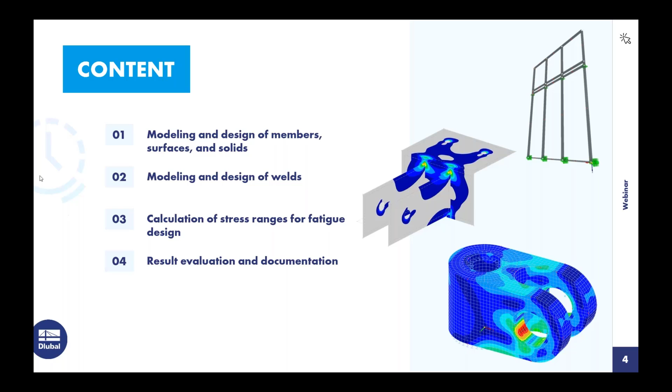For this, I have a short agenda: which elements we can design, what new elements you can design, and how you can document it. In my style, I always want to present all these features in a short story, so I prepared some elements, or let's say models.

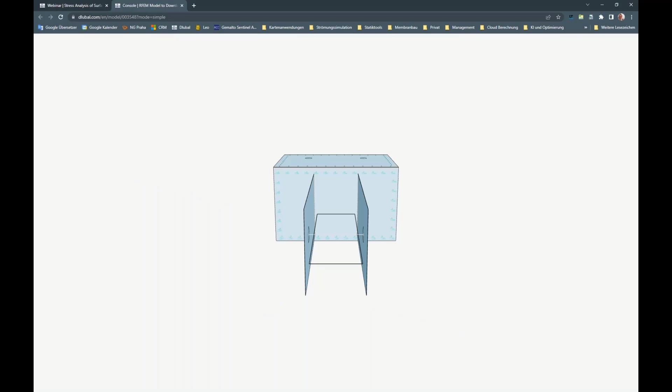We will start today with a facade model from members. Here we try to model it and design the members by stresses. Then we move on to fixing this facade on the concrete slabs by modeling a console. Here we take care about design of surfaces and design of welds between this angle and these ear sheets. Last but not least, we take a look at a solid model. I want to show how you can design such solid models with the add-on, how you can detect stress ranges, and how you can do solid sections.

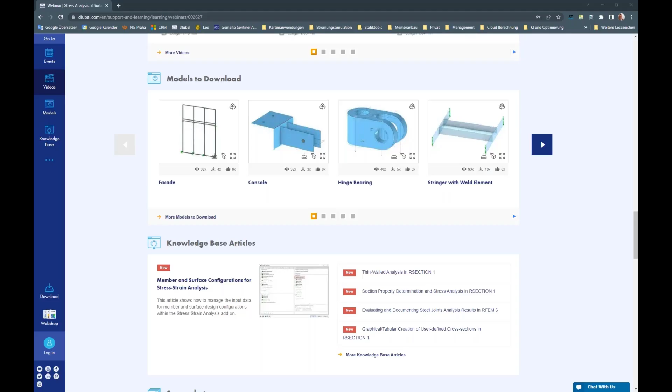So this is the introduction of what we want to do in the next hour. Now I change directly to RFEM. I prepared an open RFEM here. Of course, we can start now modeling this facade by giving this grid.

But I think when you're starting modeling facades, you always will start with a drawing from the architect or whatever. I prepared such a drawing in AutoCAD with two layers, one with axis, one with facade. I'm overtaking this geometry directly from the opened AutoCAD sheet into RFEM by using the import function, the direct interface to AutoCAD.

This is quite comfortable because you don't have to take care about geometries and you can overtake it directly. The only question the program wants to know is how it should orientate it, because AutoCAD has a different coordinate system than RFEM, but our developers implemented a nice option to rotate or mirror it. For this model, the y-axis is Z, and the z-axis we will mirror.

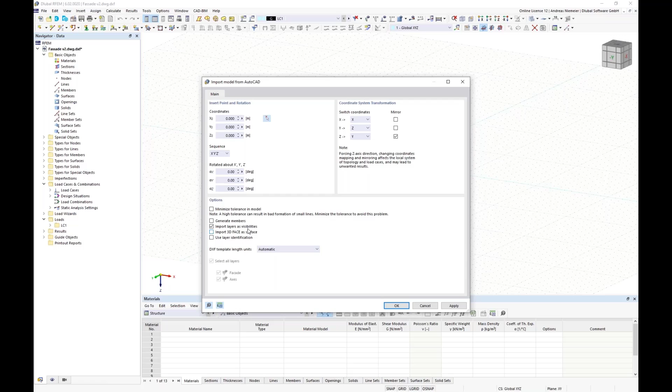To be organized, we say please overtake the layers from AutoCAD into visibilities, which is similar in ours. If we overtake it and confirm the dialog, you will see the facade appear in the background. As expected, we will get two user-defined visibilities: one facade, meaning the outer layer, and one axis layer. For our purpose today, we only need the axis layer, so the facade part we will delete. I select it and remove it.

So now we know exactly how big the facade is, what are the dimensions, what is the grid spacing, and we can go ahead modeling this structure. For this, of course, we take a closer look on this model and see the drawing of this facade, the lines from left to right and drawn over the mid elements.

This is not really suitable for RFEM because you have to define here some contact definitions. So we repair it with this intersection function and create single lines.

In the next point, we try to add members with suitable cross sections, and for this I prepare material and sections before. Therefore, I open here this material table. You see the program already defined a steel with sections from the AutoCAD drawing, but we don't need steel, we need aluminum here.

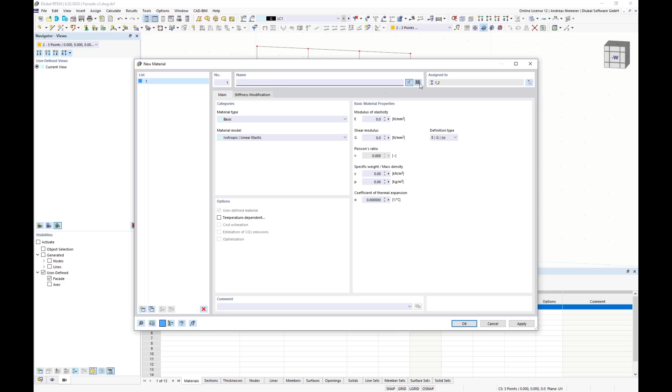Therefore, I delete this import and define here a new material by using this keyword search 6060, and select here, for example, this T6 aluminum from Eurocode solution and confirm it.

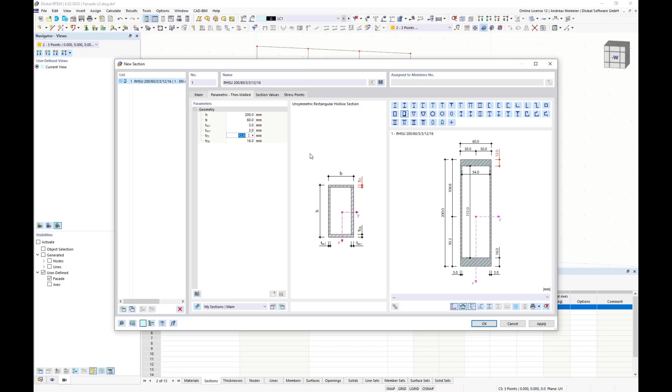It's a rectangular hollow section where you can specify the thicknesses individually, which allows you to simulate all these cases in simplified form. I define here height 200 millimeters, width 60 millimeters, thicknesses 3 millimeters in both directions, and for the short thicknesses I use 5 millimeters.

Because we have a similar cross section for the horizontal members, I select this already defined cross-section, copy it, and modify it so it fits. So I change it here to 180.

Okay, now we have prepared everything. We can assign it, and we can start assigning.

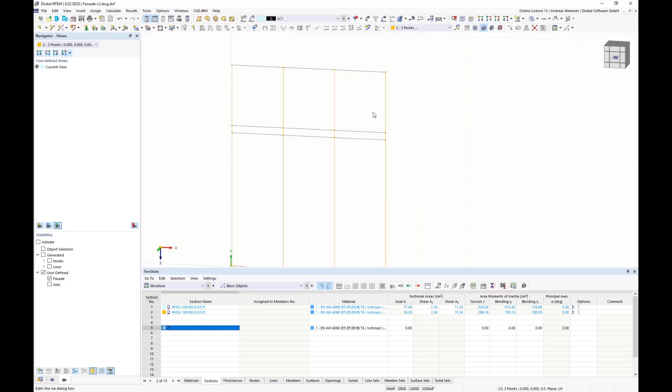So I select these vertical lines by pressing Ctrl at the same time and go into the properties of the line and select the option member. This is designed for RFEM, so it knows I have to apply a member with a specific type. We use beam, and as cross section we use the first one, and after confirmation the program distributes this cross section to this line.

The same we will do for the horizontal elements. So we select it, right click, edit, members, the same action like before. The only change is that we use this second cross section.

So far was everything easy. If we take a closer look at this facade now, we will see that the program has rotated the cross section in a wrong orientation. This comes from the basic definition of how the members are placed in space, but it's not a big deal.

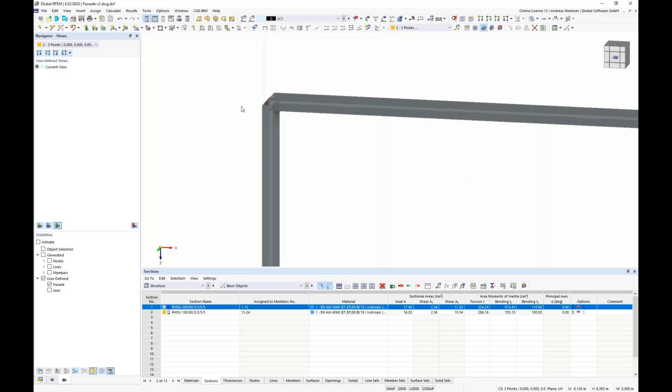We can open the section list, select both cross sections, and use the section rotation, and define here, for example, 90 degrees. After confirmation, you will see the program orienting the cross sections as expected.

So far we have defined the grid of members, and we can start adding additional properties like hinges, and bring in some organizational stuff.

For this organizational stuff, it's interesting that when I draw with my mouse cursor above these members, you will see it will only select these elements between these horizontal elements again and again, but in reality these elements belong together because they're manufactured from one beam.

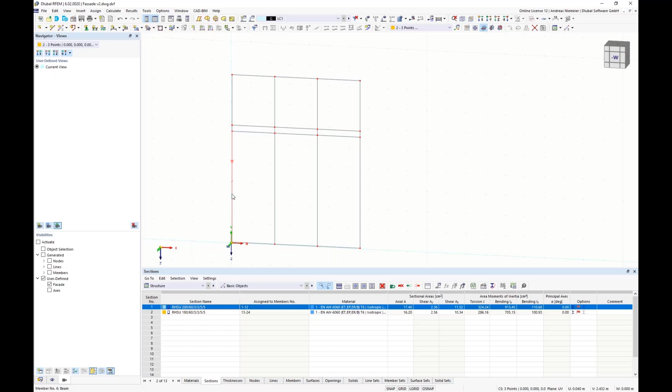Therefore, I select all these members and say in the properties or context menu, members, please be a member set. The program realizes 4 different settings, and now we have defined it as a member set.

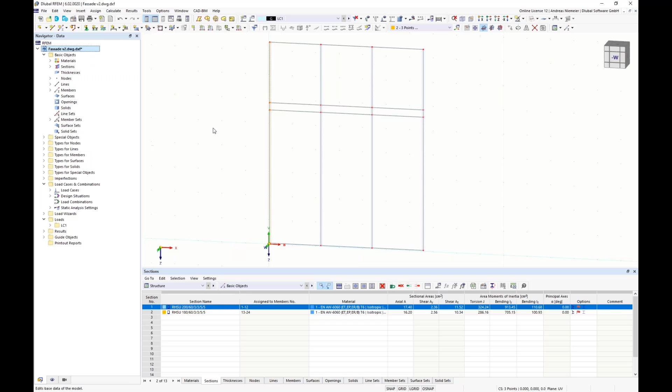In the next step, I want to introduce a special feature from RFEM that should help you with organization of the structure and further also for design. Here, please open the base data and open the settings and options register, and you will find at the bottom 2 options: member representatives and member set representatives.

This is now easy because we can use these settings for defining some stuff, for example, hinges. I can select all by using this option and say, yes, of course, we have a hinge on both sides.

Later we can use this definition for reducing my documentation, because I can document only these two elements, since it uses the biggest forces of all available elements and outputs it in this definition. But I will show you when we have these results.

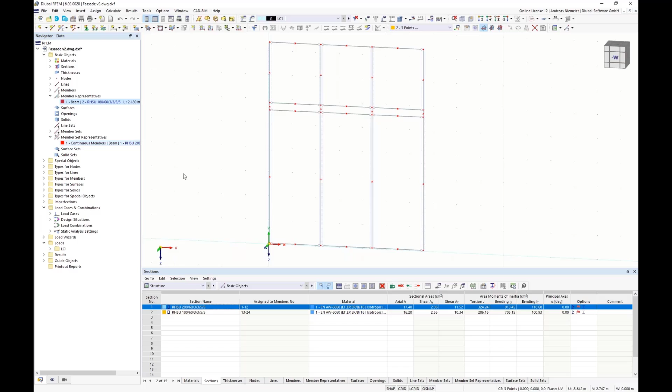Now the structure is so far ready to apply boundary conditions. Here I'm starting with the load boundary conditions, which means we create a load case for self weight and wind. For self weight, I open here the list. We can define here name, self weight.

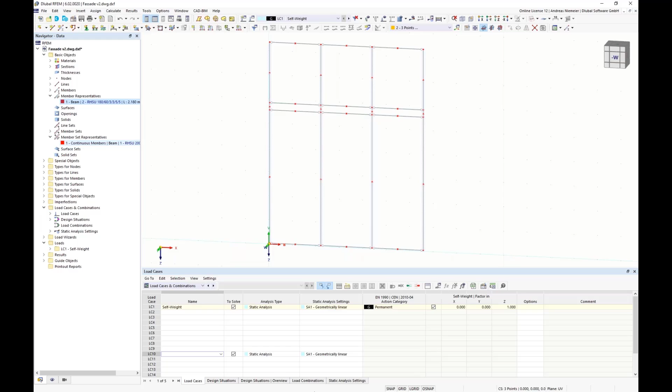When we take a look, of course, the self weight is activated here, but we have also to consider the weight of the glass. If you have to model such a facade, the glass is not inside the members, it's in front of the members. Therefore, it brings us a torsion bending moment on these horizontal elements.

And how can we consider this? We can consider it with a load, and to know where the eccentricity should run, we activate here a member axis system. This shows us, for all elements, the z-axis shows inside the monitor. So if we assume the glass is in front, we have to define the eccentricity in the -z direction.

Now let's apply the load of the glass panels in front of the facade. Here we take a member load with type NX, where I define 3.75 kilonewton, 2 pieces of it, and place it at 10% of member length plus 80. We define here a load eccentricity, which should run in the Z direction with -160.

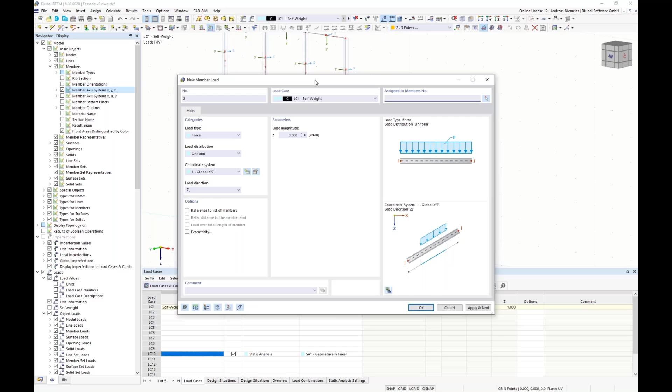Now we can say this load should be applied on this member, and for the others we do it similarly. If we close the dialog, we can overtake the basic settings with this overtaking function. Now let's write here 0.2 for the small panels, select these members, apply and next.

And the last one is 1.7, and here are these 3 members. So this was a quite easy task to apply such loads, such dual point loads. Now let's go over to the next load case. For me, it's important now to present this stress strain add-on to have some different load cases.

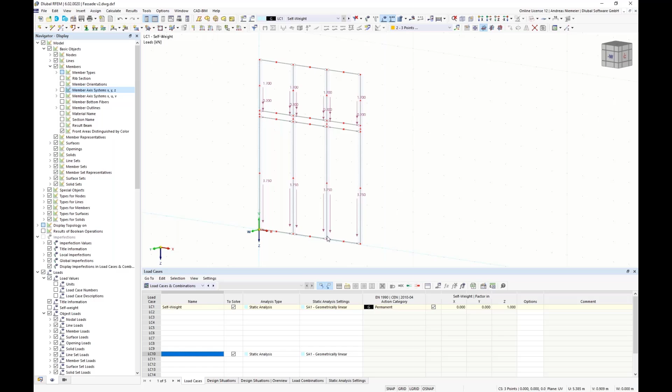So we need something, and in this case it's a facade, so we apply a wind load. Here I use the category wind. Let's apply the wind with a wizard.

Here we offer a member load from area load wizard, where we can say the load could be, for example, 0.7 kilonewton per square meter. It should run in the Y direction, and it should act on all of these cells where I draw a window above.

After confirmation, we see a symbol which symbolizes this load, and behind, if we display it separately, you see it will distribute it as expected to the members, but for a simplified display we can use this picture here.

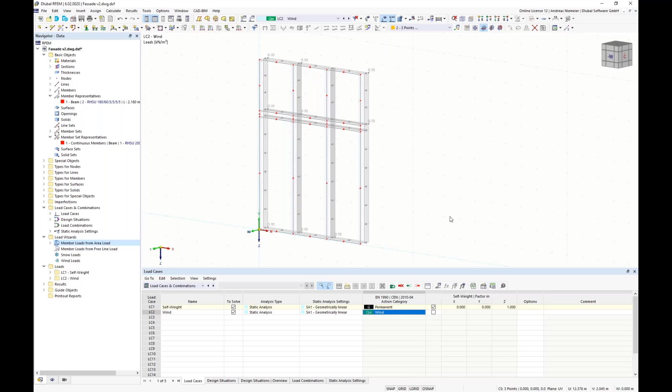Now we are almost ready. The only point missing is the boundary condition for the support. Let's take a look. Maybe let's use here this global coordinate system, and for this we support it in the middle, so here.

Therefore I select this member and divide it in the middle with one node. Of course, the member representative remains because it belongs to the member set. Now we can use these nodes and apply here a nodal support, which is fixed in X, Y, Z, and the rotation about Z.

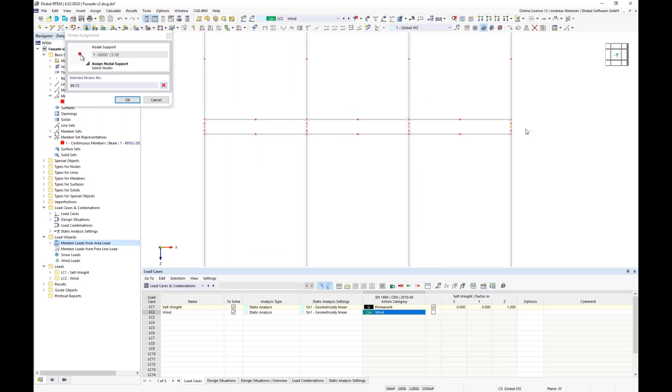And so far I can fix it on this slab here. For the bottom, we take a similar boundary condition. The only thing I do here is release this degree of freedom so that I have a free movement in this direction, and apply it to these nodes here.

Now my structure is almost ready. We have supports, we have loads, we have a structure from members, we have member representatives, and the question could arise how I can design it according to stresses.

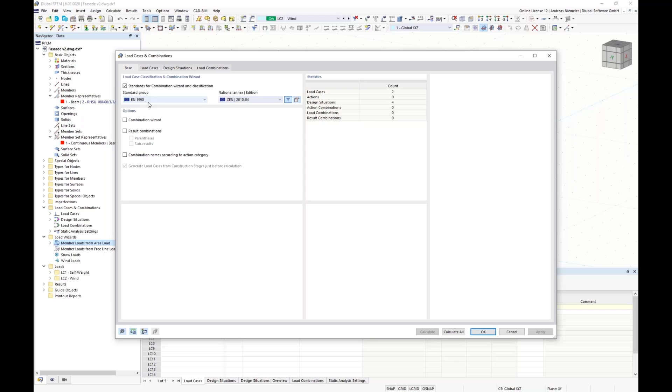To design it according to stresses, we need a combination of loads, meaning I want to combine it according to this rule, for example according to Eurocode 0. I use a wizard for it, and the wizard thinks we have to do a complete job, so it offers us ULS and SLS checks.

For my presentation today, only the ULS checks are important. Therefore, I remove it. And this means now with this setting that the program generates combinations according to this law here. You see also this box is empty here. There's a lot of free white space. The question why I will answer directly. But if we go to load combinations, you will see the program creates these load combinations according to these defined loads.

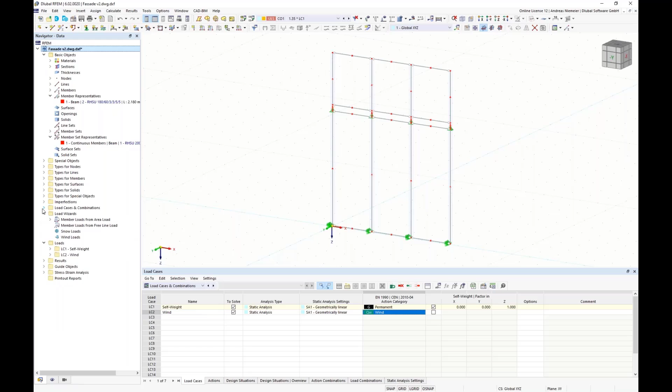But how can I tell the program that it should do a stress check for these members? For this, you have to open the base data, go to the add-on register and activate here the stress strain analysis. For the presentation it's good that I activated it afterwards, because when I activate it afterwards, we get a new calculation task, a new table, and stress strain analysis here in the Navigator.

But if you go back to design situation, you will see suddenly we get here the option stress strain. And this is a really important fact, because now this design situation, DS1, including these combinations, knows it should run a stress strain analysis. Of course, I can deactivate it, but it knows it should do it. And if we calculate all, the program runs all available load cases and combinations, and afterwards it runs a stress strain analysis. So static analysis is done, we get deflections and forces and so on, but now we get also a result stress strain.

So this is the game behind. You define in base data the information what you want to calculate, and the design situation is the basket of forces that will be moved into the stress strain analysis. To understand it in more detail, we open now the table of stress strain, the input data, and here you see it's matching. In the first table, you will see DS1 is activated. In the second table is activated what should be analyzed.

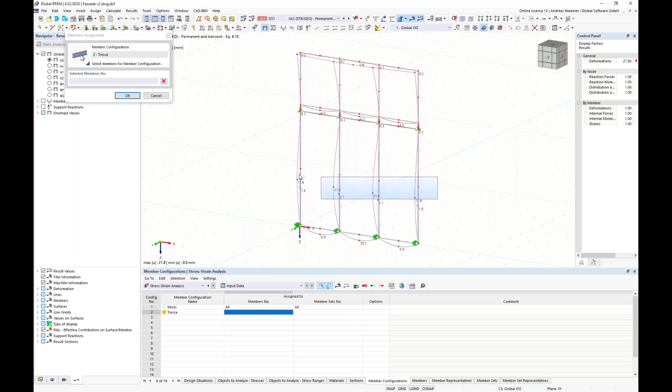And you see this is not only one setting, you can have several. For example, we give here a name, Mises, and we use a second, for example, Tresca. For the Tresca setting, we define the Tresca option. Now if we confirm this, the program wants to delete results, and we can say this Tresca option should be used, for example, for these 4 members. What happens? The program says, okay, this member should be checked with the Mises setting, this member should be checked with the Tresca setting.

An overview of all this you will get in the last tables. For example, members: you see member 1 is checked with this, member 6 with this. So you get an overview in the table, but of course you will get the result of all these settings graphically also, because in the results now you get not sigma tot and tau tot, but sigma Mises and Tresca. Mises is defined for all, Tresca is defined only for these 4 members like we did it.

And because this is only the existing stress, you can also visualize the diagrams of utilization. So here you get the utilization visualized as diagrams on members.

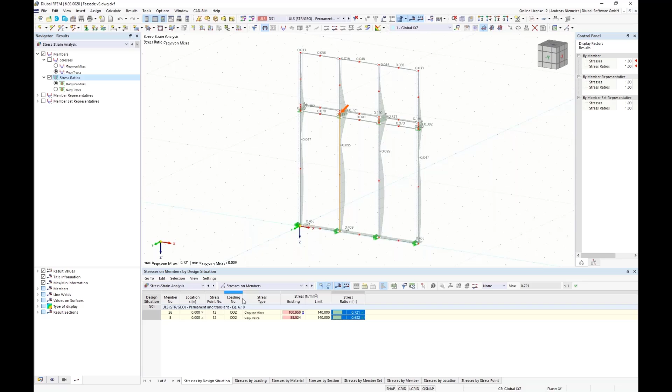Now, if you watch all these results, you will see we have stresses on members. This will be distributed in different, let's say, ways. For example, stresses by design situation, stresses by loading. You see this load gives this result, this load gives this result, by material, by section, and so on. For example, by location on every x-place. Then you can go through every x-place of stress.

And if you say, oh, this stress is interesting, I want to know more in detail, you can open here the details, and you will get an environment which shows you for these coordinates the material properties, the section properties, the forces on this x-place, and the stresses, and the formula which leads to this utilization.

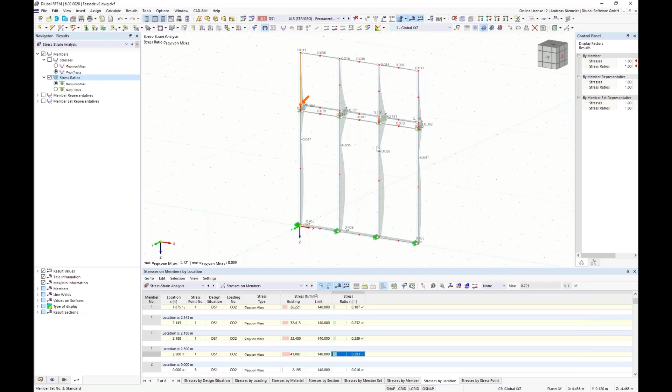And now you see, if you watch all these results, endless results, we know as engineers the biggest one is interesting. You get it here, and if you need it for different positions, let's use these representatives. Because this representative tells you, for this member, this is the biggest result for this horizontal element, and this is the biggest result for the vertical elements. And if you visualize it here, not by members but by representative, you get the biggest result overall visualized. So everyone has the same result, and it's representative of all these members.

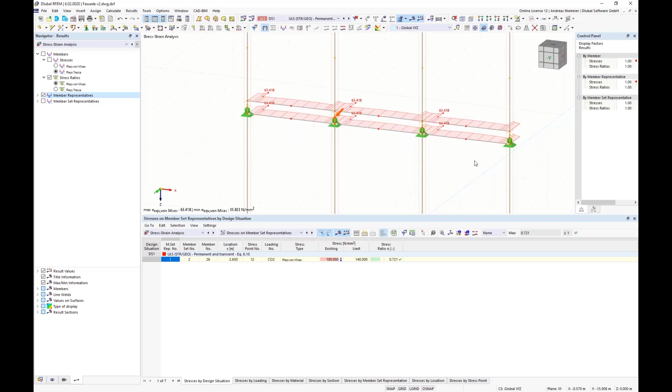So this brings me to the end of this example. I wanted to show you here, to repeat, how you can model a small member structure and how you can make a stress check for these members and representatives. And now we want to extend it, how you can use this add-on for a surface model.

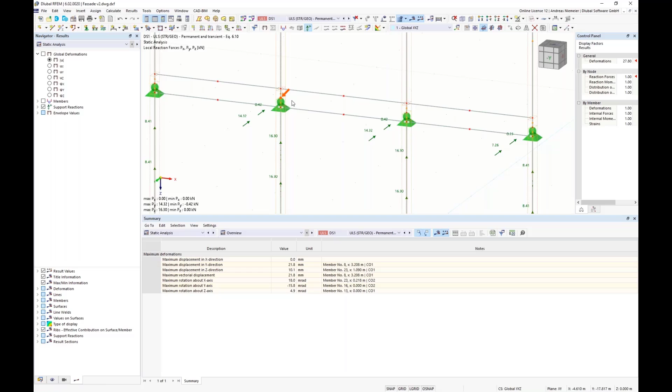And we imagine we have to fix this facade here. We read in the static analysis that we get here forces of maybe 16.3 kilonewtons downwards and 14.3 kilonewtons out of the monitor, and we have to transfer these forces from this framework model to the concrete slab. And how can we do this?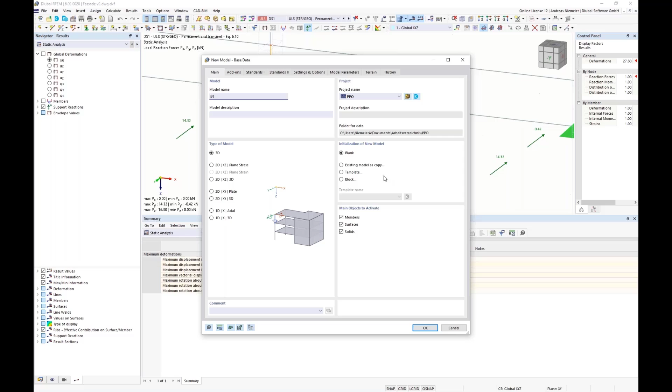Here I copy such a member to the Windows clipboard with Ctrl+C and open a new model, and we say here K5, for example, and activate directly Stress-Strain because it's our task today. We confirm this and we get an open model. Now we set our focus in the middle and press Ctrl+V. The program asks me if it should give an offset for this model. I don't want that, and I get this member fragment here in my model.

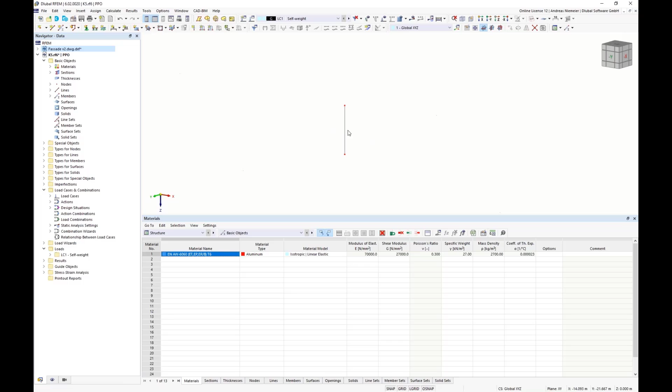If we display this wireframe model, you see it's a member with a cross-section, and if we select this member and go into the context menu, you see we get an option: generate surfaces from member. This gives us now a surface model discretization of this cross-section. Here we have the surface thickness 3, here the surface thickness 5. But in fact, we need only the floor plan of this structure.

So if we take a look here, let's deactivate this table. We now have to fix this facade to the concrete slab, and we have to model here a console that can take this over. And this is my basic geometry that I should take over.

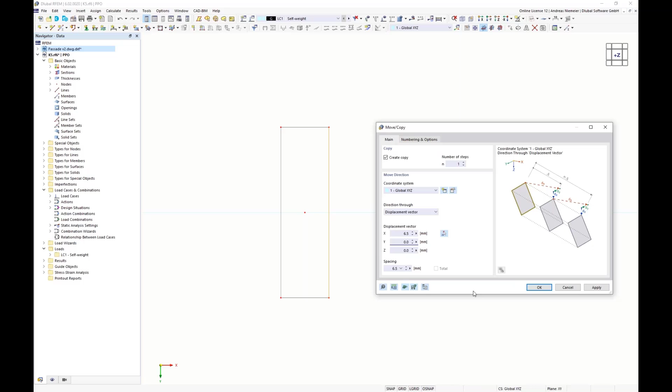For this, I select this line here and say I have to move it in the right direction, and we copy it. We use millimeters for better description, and we move it in X direction: plus 1.5 because it's half of these 3 millimeters, plus the thickness of the console, maybe 10 millimeters, and half of 5 millimeters. I can calculate such inputs directly, and with confirmation we get the line on the right side. The line for the left we can copy by drag and drop.

Now we know these surface members here don't have to run completely to the outer edge of this cross section, so I shorten it a little bit. In this case, I don't create the copy, and I change it here with minus 30 millimeters and confirm it. For the other side here, I select these nodes, and I have to extend it to connect to the concrete slab.

So I use here also a modification in Y direction with what we need here, minus 2.5, minus 50, and minus 5 again. And then these elements will be extended here. Now let's create the first metal surfaces. Therefore, I select both lines and move it a little bit upward at first, here with minus 50 millimeters.

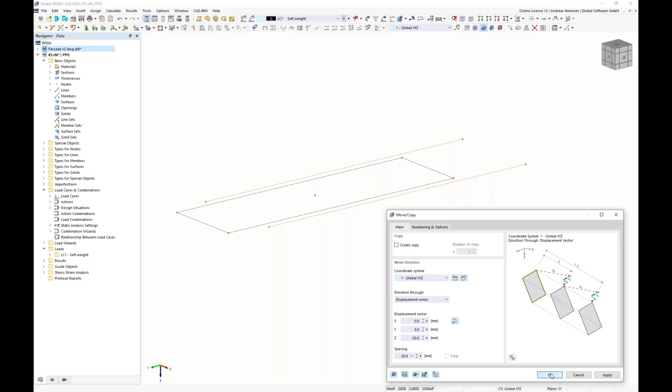And now we draw, moving it down with a copy with 100 millimeters, a new surface by defining the vector, and by using step links, saying please create a surface in between, and if I confirm it, I get my surfaces from these elements. Now we can create the first part of the angle, what connects to the concrete. Here I use a function create node between two elements, for example this, and we create the standard node and apply it.

Now we can copy it directly on the bottom, and we move this 10 millimeters above. So we say here -10. Okay, and the same for this node here, also 10 millimeters. Now we know the height of this back element. We move these nodes now finally in X direction, for example 100 millimeters, create a line in between,

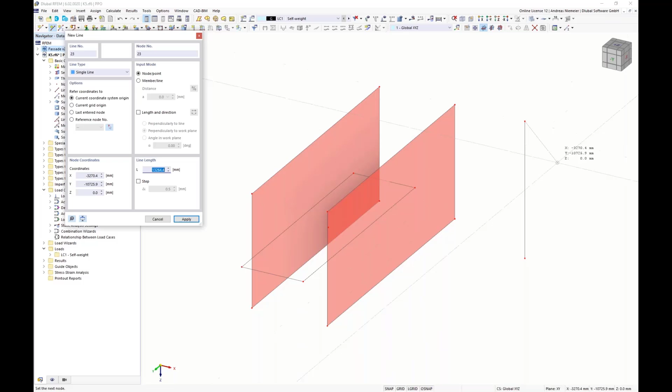and then we draw a new surface, create copy with, oh, I made an error, I think, again. This is 10 millimeters, I should remove. Okay, now we can make a line in between and draw a new surface by using the vector -200 millimeters, create copy, using step links with a new surface and connecting it. Then we have almost all elements done.

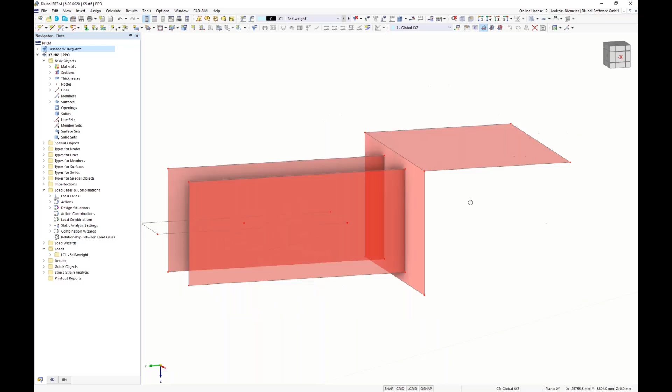The only thing missing is maybe the upper part of the angle, and here we use the copy command again. We zero this, and in Y direction we use -150 and create a new surface. So far, this was the modeling of such a console. Pretty easy, I would say. At the moment, the surfaces are red because they don't know their thickness.

We select now both and define these surfaces, define stiffness type standard and assign a new thickness with 10 millimeters, and we would like to have steel S235 from Eurocode, for example. Now this is assigned and the console appears in blue. In the next point, we should take care about boundary conditions, how it's fixed.

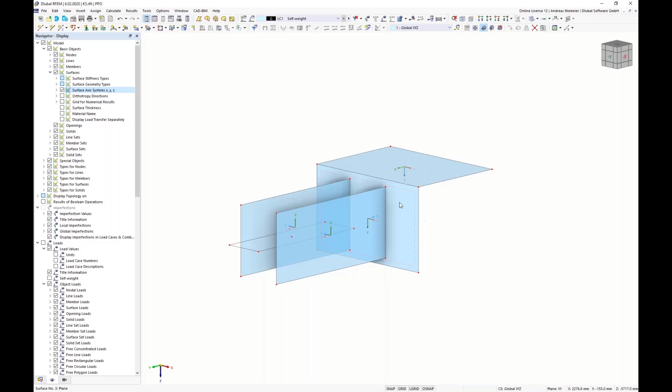We know this angle will be supported on concrete, therefore I display the coordinate system for the surfaces. I see it's pointing in direction to concrete. I select both surfaces, edit a support, and select support condition. I don't check it because I think it's unrealistic. I define a resistive spring and say it should act only in direction to concrete. In negative direction it should fail. And we have these springs.

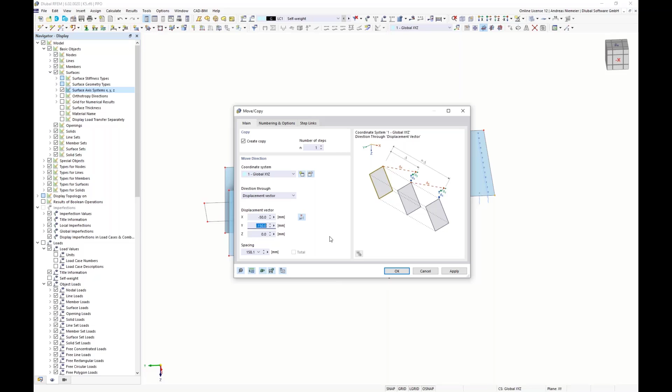Next I have to take care, because it's not supported but it can be removed, so I have to fix it against tension, so we have to use anchors here. So I use this corner node, create a copy with -50 and in Y direction with 50, and create a node. We get it here, and the same for this node where we only change this minus, and get the place where the anchor should be placed.

The anchor has a diameter of 10 millimeters, so let's define a hole. We pick this and define a radius of 6 millimeters, for example. The same for this. And we know now this node will be supported. We have to transport the forces from this element to this node, and for this I use a so-called coupling element. I use a surface with stiffness type membrane without tension, so it can only transport compression force

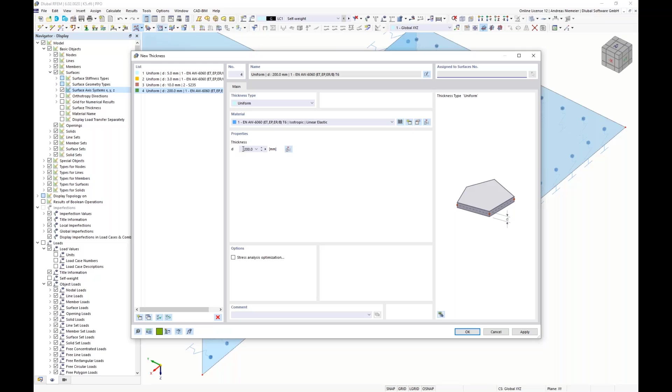in membrane direction. And for this we create a new thickness with 10 millimeters and a new material, again steel S235. Okay.

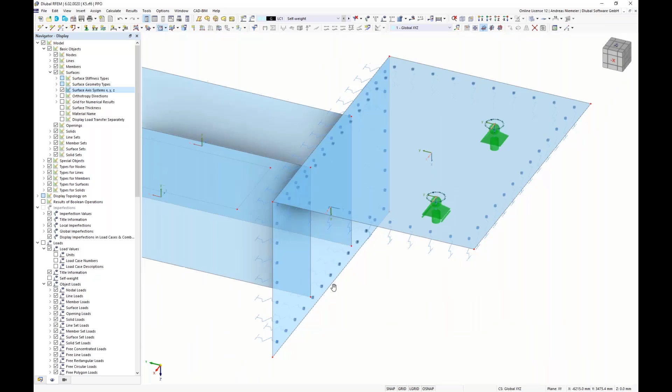Okay, and now we place this surface inside this hole. Now we can place a nodal support here. We define here, let's say, a nodal support without rotation fixation and place it on this situation. And now we do a second. The only difference will be that we release it in X, so that we get no, how to say, strain or unrealistic stress in between.

So now we have modeled this situation. In the next instance, we have to model the load introduction. It will be introduced in the center of gravity of this floor plan of this column from what we copied initially. And for this, I create only a short member here. To know the intersection points, I draw a window above this line, and you see it will cut it directly with the cross section. The remaining elements I can remove.

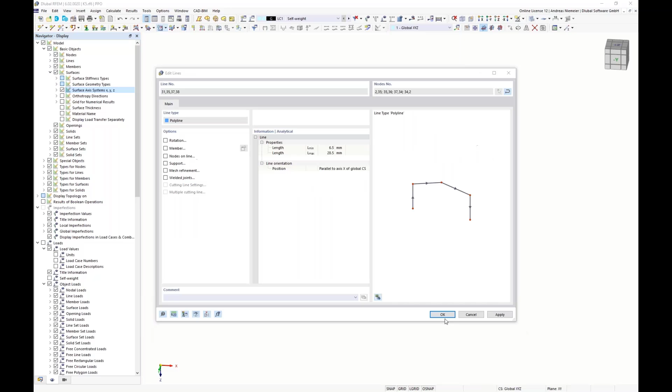And now I select these lines and give these lines a member stiffness. I say it's a member, and because it should only transport forces, I use a rigid member. And now I can place my load on the middle point, and this rigid member will transport it to this surface model. The only thing missing is that I have to introduce it here to this surface model. Therefore, again, I model here a hole with diameter of 20, so I define a radius of 10, the same on this side.

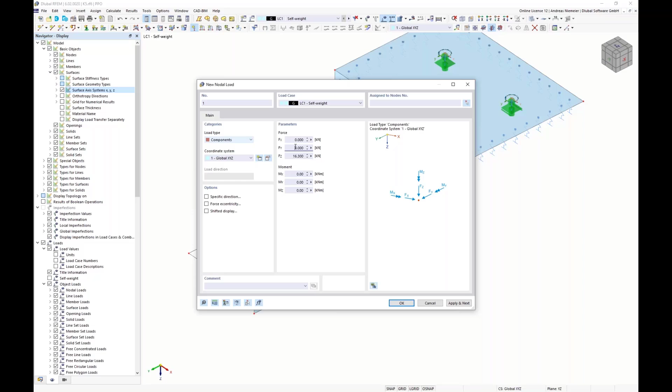Okay, and let's introduce again this membrane without tension with this thickness number 4 and place it inside this hole. Now the model is almost ready. We should define only these forces from the facade, and if we remember right, we have 16.3 kilonewtons downwards. I use this component solution, so 16.3, and in y direction we have, I think, 14.3. Now we place it here, and you see the game. The load will travel into these sheets and will be moved to this surface support and nodal supports.

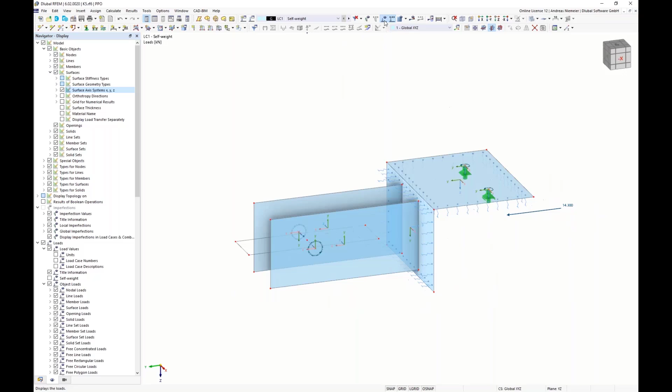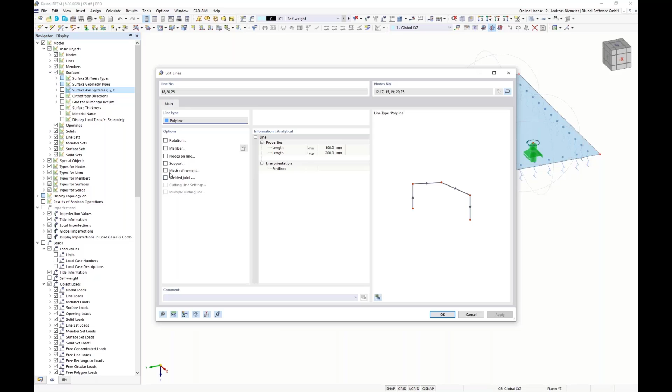To get good results, we should mesh it fine. So we go to our mesh settings and define, for example, a mesh of 10 millimeters. If you see this mesh, it looks globally nice, but I expect that we get some singularities here. So I refine the mesh on these nodes, right click, edit, and we say we have a mesh refinement where we place something like a sphere around where the mesh will be reduced to this size. And the same on these connection lines, because here we'll also play some music, where we need a refinement. So let's take a mesh refinement, define a condition, maybe target length is 5 millimeters.

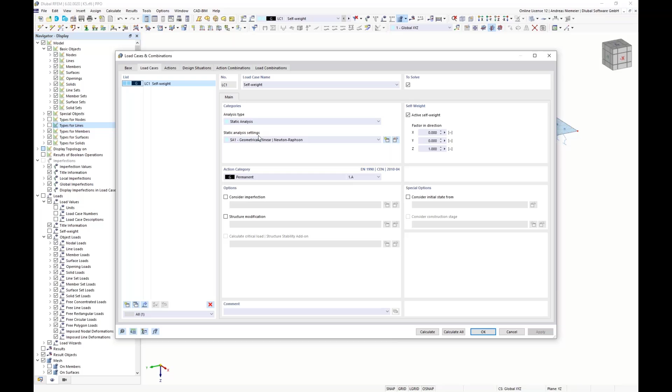And now if we mesh this model, you will get what is expected. It will be refined here, and here. So far it looks nice, and if you don't want to see these symbols, you can remove type for nodes, for example, and also type for lines. Now we can start calculation. But the only thing missing: we have to tell the program that these loads, 16.3 and 14.3 kilonewtons, already contain gamma factors. For this, we should remove this wizard.

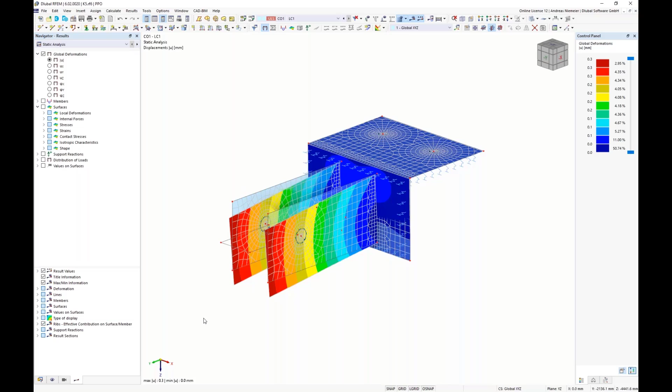We say this load case is fine, and here we only take a look at this ULS setting. Stress strain is activated, and this should be done for a load combination with DS1. And here we say, please consider this load case, because it could be done linear. And if we calculate all, we get the static analysis, marked with SA, and the stress analysis. From a plausibility control of static analysis, deflection goes downwards with 0.3 millimeters, it's fine. And the support forces, contact forces, are also fine. It will be pressed against concrete and supported here.

So far, I would say the model reacts as expected, and from stress strain analysis, you get, similar to the member model, a selection of stresses. Maybe take stresses on surfaces, the existing one, and utilization against the limit stress, we get the utilization. Now, what is a little bit disturbing is when you read these stresses, you are almost at 600 Newton per square millimeter, which is pretty high.

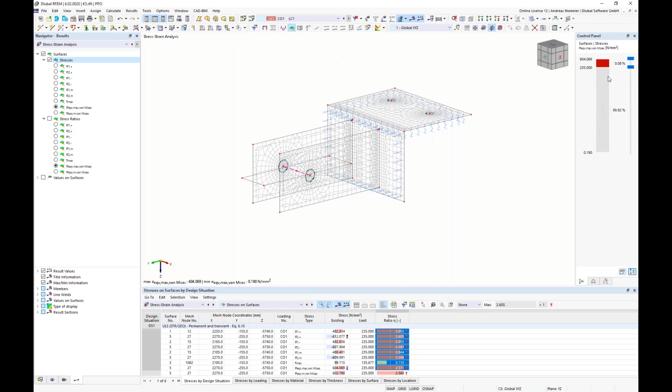If you want to search where this peak is, you can define a limit with 235, which creates a special panel running to red until 235, and the peak over is only this dark red, and you see it's only this singularity here and here. So you can optimize by displaying only the elements that should be designed, so surfaces, stiffness type standard, and you see, okay, now we have not 600 but 430, and the peak is here.

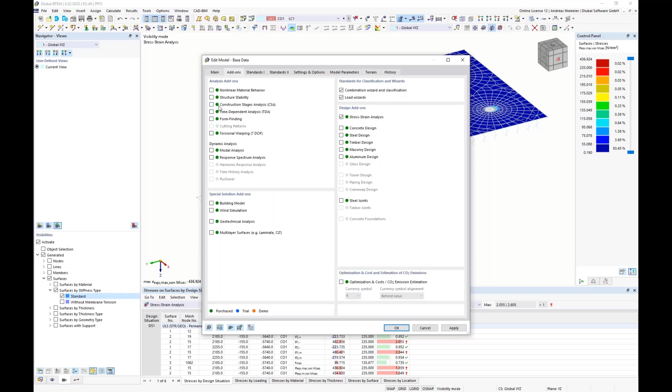How can we remove it? Of course, it's, let's say, a singularity, but in this case, for example, you can use a nonlinear material to use a yielding effect. For this, we activate here nonlinear material behavior and activate it for this material here, nonlinear elastic surface solids. And if we rerun the analysis now, you will get, for the existing stress, something up to the yield stress, which means we now have a yield stress of 235.

So far, results okay. But the question is, do we have a yielding effect? And we have to check it. And this is also the reason why the add-on is called Stress-Strain. You can also calculate strains with the add-on. You can activate it in the global settings.

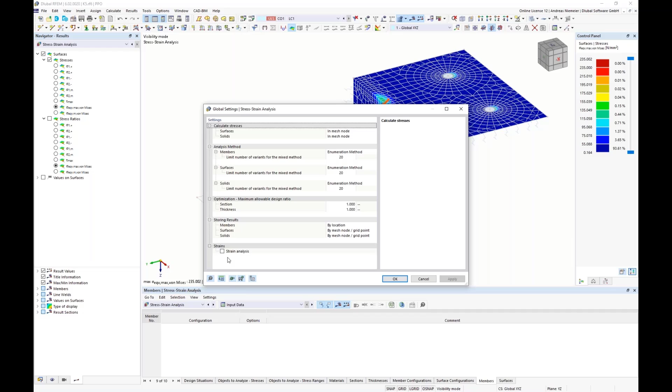And if you go to the surface configuration, similar to the members with this table, you can say, please calculate only sigma equivalent von Mises, and for the strains, please calculate epsilon von Mises and compare it against a plastic strain of 50 per mille, for example. And now, if we calculate this add-on again, we get not only stresses and utilizations, but also strains. And you see, okay, your strain is here at 1.9, so far everything fine. And you can check it here. So now we come to the point that the surface is fine.

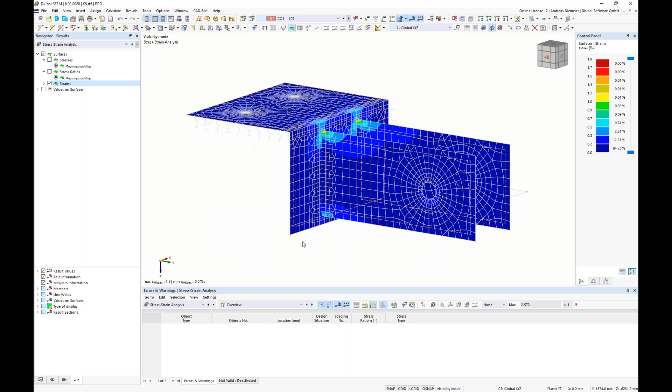We have to take care of the next topic, which means welds. If you have to weld these elements to the angle, we offer a new solution in RFEM 6. It's hidden here in the types for lines. You can place line welded joints here. It's a typical post-processing effect, which means you can define what the weld looks like: butt joint, corner joint, lap joint, T-joint. Here you can say, okay, the shape is a single bevel, double bevel, single J, or a double fillet.

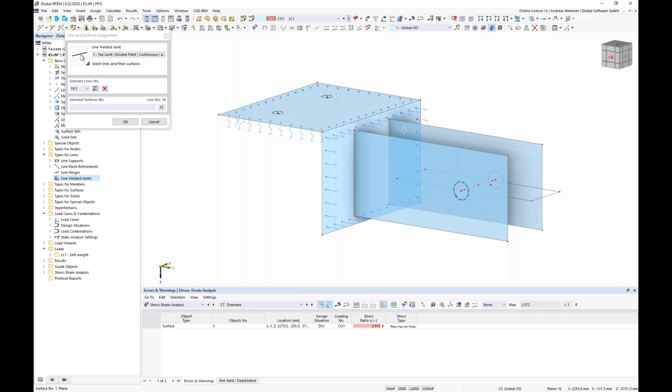You can specify the size and place it here in between, where you say this line, this element should be connected to this element. The same for this element connected to this element. And similar to members and surfaces, you have a stress-strain analysis where you can specify which element should be calculated. The program transforms the stresses on the edge of the surface to a normal load, bending load, shear along line, and shear perpendicular to line, where you can say, please use smoothing or no smoothing, and do you want to use a simplified or directional system.

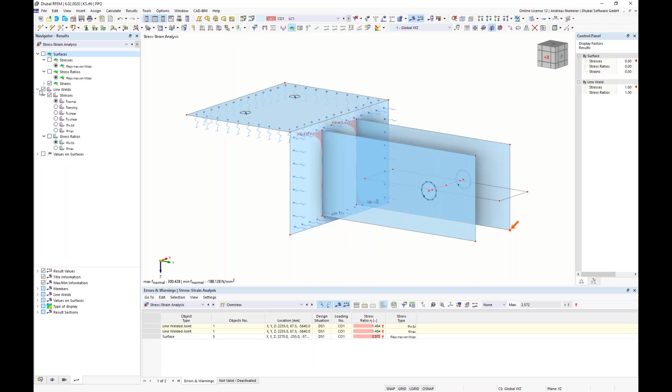And here, if you calculate the simplified system, you get a normal stress, a bending stress, a shear stress, a shear along the weld line, and finally an interaction of everything, where you can say, please check this value against the allowed limit weld stress, for example here 208. It's calculated according to formulas from Eurocode, but you can use it for all other standards, therefore we made it open. And when you calculate this, the program deletes results from stress-strain, and after recalculation you get a result for surfaces, which we deactivate, and a result for the line welds.

You see here normal stress, bending stress in X direction, shear stress in X direction, shear in vertical direction, and the interaction plus a utilization. And you see, okay, here we have a small peak which is overutilized. If you see these diagrams, you ask, okay, it's nonlinear, clear, but if I do a hand check, I distribute it over the complete length.

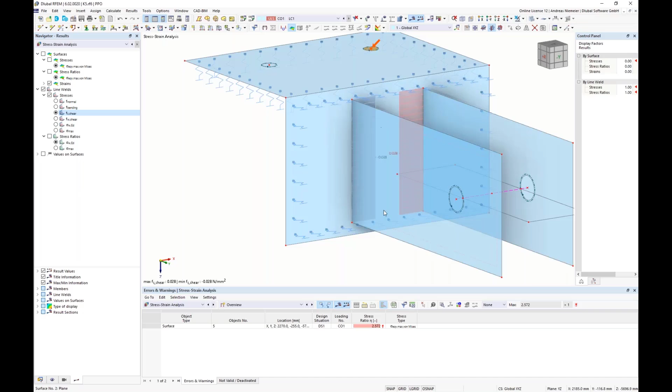I know, therefore we give you the option here in the line welded configurations, in the special options register, to say, okay, please smooth the normal load linearly, the bending load constant, and the shear loads also constant. And if you check this and recalculate the stress-strain result, you will now get a suitable result, because the shear load is now constant. And the normal load will be distributed linearly, and this results in a better utilization, and you can do the check. But it really depends on which stresses you use, smoothed or not smoothed.

So now we come to the next chapter. Here, to repeat, we designed surfaces and line welds with stress-strain, and now one object is remaining, a solid element. And for this solid element, I prepared a model because I don't have much time today. I prepared here a small knuckle. Where is it, desktop, knuckle for webinar.

Stress strain. Let's open it.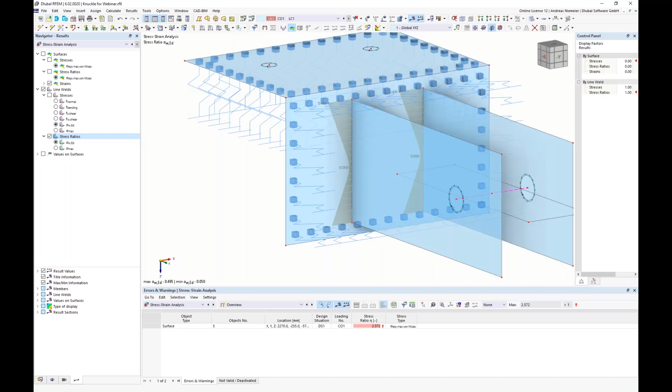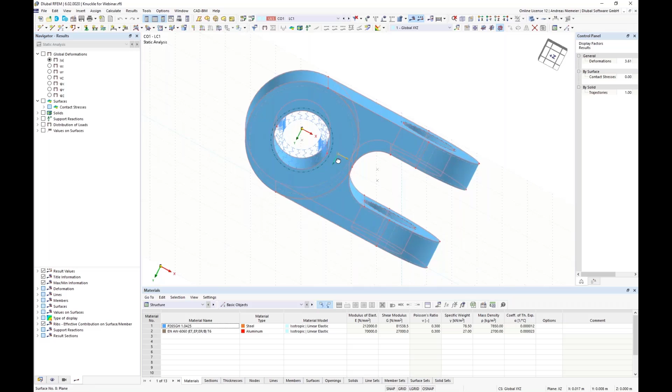Here you will see a solid model. For an overview, remove mesh, remove load. It's made from surfaces with thickness zero, and I filled in a solid condition. The model will be supported with a surface support in this hole, and this top and bottom surface, and it will get a load, maybe downwards and upwards, to create different stress situations in this model.

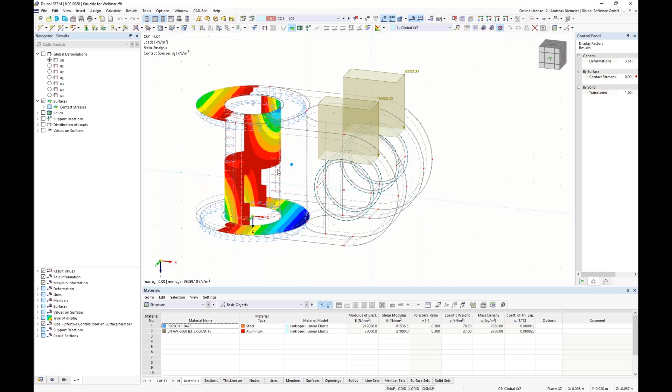If you calculate or display a plausibility check of this model, you will see the deflection is going downwards, what is clear. For checking loading boundary conditions, you will see you get the restrainment for the top surfaces, pressure here, and inside, in the bearing, you get also pressure vice versa, transporting a bending moment.

So far it's reacting fine, and it will give you stresses in X, Y, and Z directions. You get extreme stresses, what is interesting for design, and you get also strains here. So it's different to maybe members - you get directly here internal forces, like stresses, what is logical for solid elements. The program will display these forces, or stresses, on the boundary surfaces.

If you want to look inside, you can create a result section and define a cutting plane in structure. For example, we cut here in X direction. Then you create a view inside the model. But all this output gives you only the result of this selected load situation.

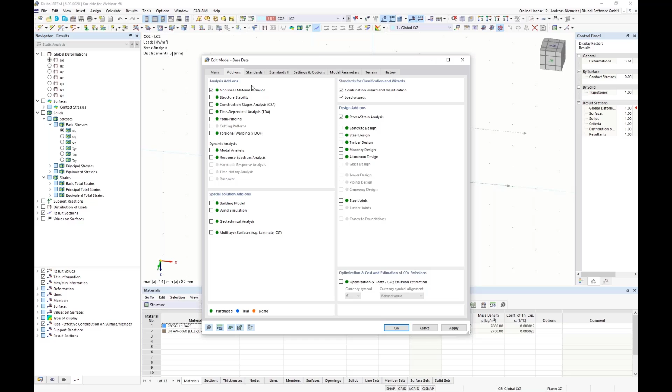If you have more, and you have to do a design, the question appears how can I do a design. This is the task of stress strain, because the stress strain add-on gives you the option to check a number of load situations and gives you the biggest stresses from it.

So if we have, for example, these two load cases in design situation 1, what is activated for stress strain, and you calculate stress strain, you get overall feedback for these two load cases. Let's activate it and calculate this stress strain analysis.

You will see you get here tables, stresses on solids. If you take a look at the input table now, what I jumped over just, we get here the program will grab solids, it will activate it. Surfaces will be deactivated because they have no stiffness here.

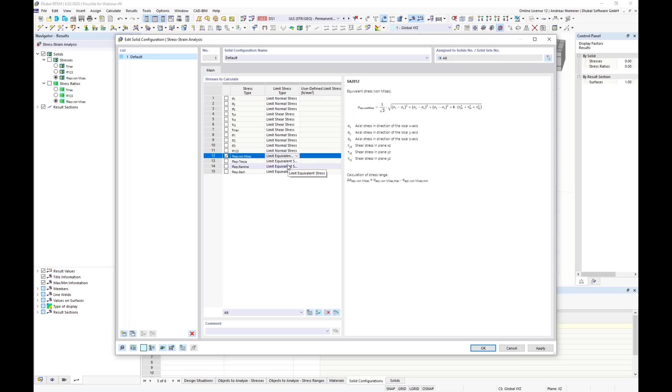It will offer you also stress ranges. And finally it will give you these solid configurations, similar to what we know for member, surface, and line welds. Here you can say please calculate me only this Mises part. And if you have special cast material, you can also check it against any user defined stress, similar to the line welds.

And if you have the task to calculate fatigue, you can activate here the stress ranges for solids. If we recalculate it, you will get now 3 results for the solids: stresses, stress ratios, and stress ranges. If we take a look at the stresses, you will see now we have an extreme here and an extreme here. This is because the program considers CO1 and CO2 at the same time and gives you the biggest forces of both. That's the difference if you watch only the results of CO1 or CO2.

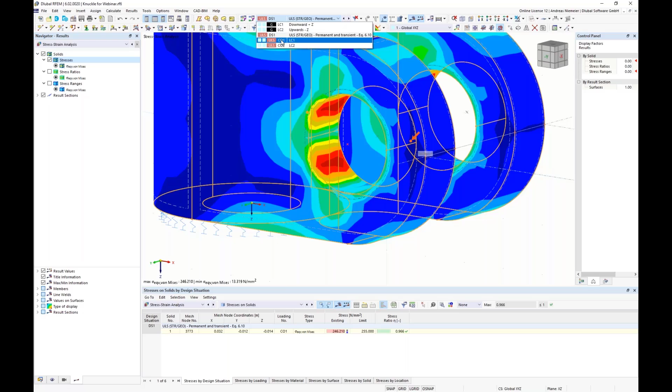Here we have 246. You get the stress ratio check where you see the extremes are under the allowed limit stress. Existing stress compared to limit gives a utilization. And if you need, like mentioned, ranges, please compare minimum to maximum stress.

You can activate it, and I did it now for solid, but you can do it also for members and surfaces and line welds. The program searches from the considered selection - here we have only CO1 and CO2 - the smallest and biggest stress on the same place, and gives you a range in between, and this will be output as a colored skin above the model.

This brings me now to the end of point 3 I want to present today, where I want to repeat what's important: you should see that stress strain analysis can calculate, or can design, solids with ranges.

So now to sum up, stress strain is here to consider a basket of forces, for example a DS or more DS for members, for member sets, for member representatives, for member set representatives, for surfaces, for line welds, for solids, and it can check the stress ratio and stress ranges, and for a specific part also strains.

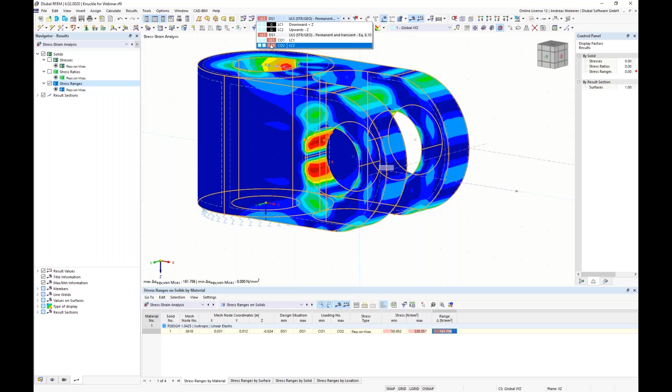And if you want to document all such things, we can use here, for example, our second model, our surface model here.

Maybe if we remove types for surfaces, then it looks more suitable. And if we say, okay, how we can document all this stress strain stuff, we create a report, printout report, new report, give here a name, for example, stress check.

Let's start from scratch. Let's say we want to document from basic, from types for lines, the line welds. In this model we have line welds and surfaces. So the stress analysis, the global settings, the objects to design for stresses, the design situation, materials, thicknesses, surface conditions, and line welds. And from results, we check stresses by surface and stresses by line on welds.

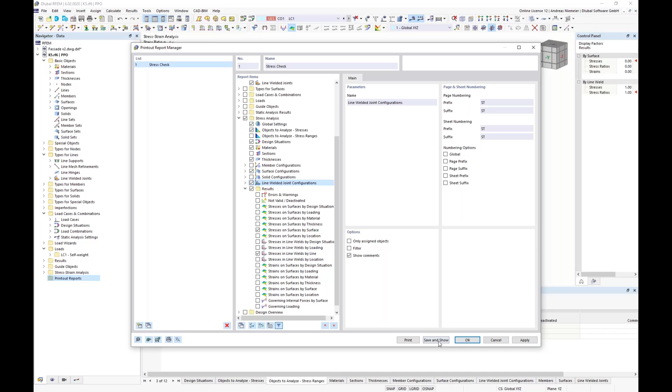And then you can create this document with all this information. The program will give you a styled document with a header, with a content, with all the tables we just checked. So line weld joints, double fillet, continuous 4 millimeters, the global settings for the stress analysis, which objects, which forces, which materials, thicknesses, and the results marked with check or red if it's not fine.

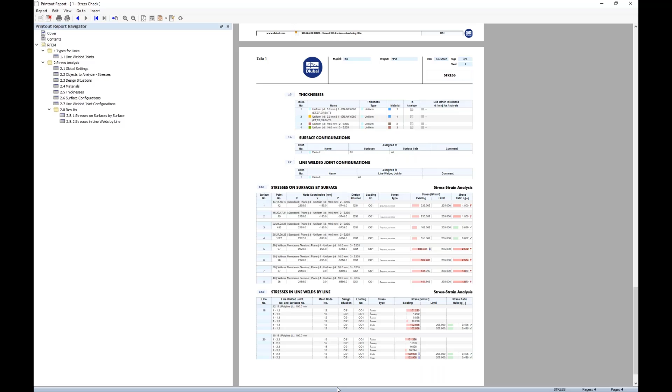And if you say, okay, I have to extend it with pictures to get a nice document, no problem. You can say, let's open the stress strain analysis and make a picture from the utilization of surface. And if it's really blue and you don't see the focus, you can say, let's visualize only the surfaces that should be designed, and use these so-called gray zones below the isobands. This is a special feature which should help you hide uninteresting parts.

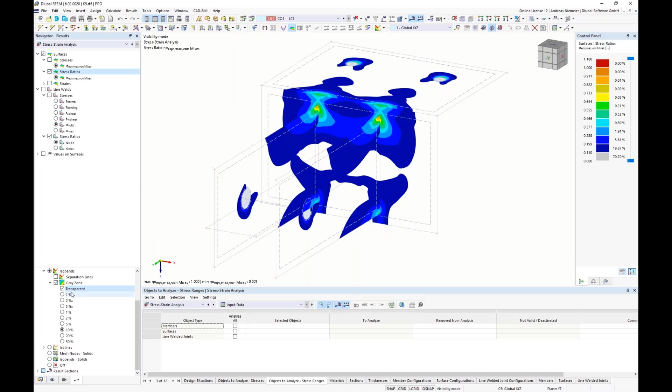You can say, please hide the 1 promille of uninteresting part, or maybe 5 promille, or maybe 10%. Then you see he hides now 10% of the uninteresting stress, what is not so close to the limit, and the rest will be visualized. Then you can make a nice picture without playing with the colored panel, and see directly where it's interesting. You see interesting is here's the load introduction, here's the load overtake from this to this element.

Now let's find a good placement in space and print the picture to report, where we say make window filling, with 3D option for example. And now we move this picture into the report.

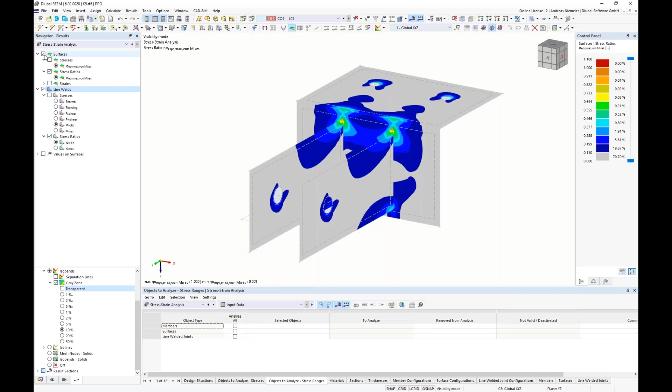And the same we are doing for line welds. So remove this, activate everything, and print again a picture with these diagrams of this utilization, and save and show, and get these two pictures in printout report. Now we have these two pictures here: utilization of surfaces, utilization of line welds.

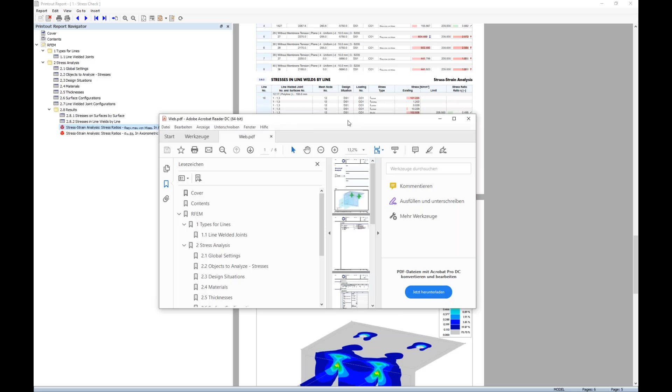And if you move this into a PDF, maybe on desktop, then you get a document in Adobe Reader. Of course we already saw the content, these tables, but in the end we have these pictures. As you see, if your client reads this and looks behind this structure, he can rotate it and look below. No problem. The same also for these line welds. He gets much more information on a sheet of paper that you can provide to him.

And this brings me to the end of my presentation, and I give back to Caroline.